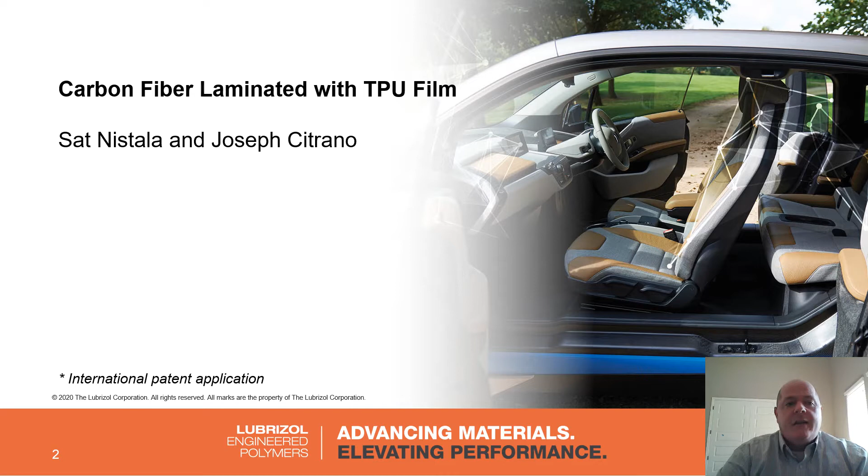Talking through the agenda: first, a brief introduction on what thermoplastic polyurethane is. We're going to talk a little bit about carbon fiber, the growing market, understand where it is now and where it's going forward, how TPU can bring value to carbon fiber laminate applications, and talk through two specific applications we have.

One is the exposed weave. It's where you can see the carbon fiber weaved into each other. This is what most people are familiar with. You see it on vehicles, in bike helmets, different kinds of applications.

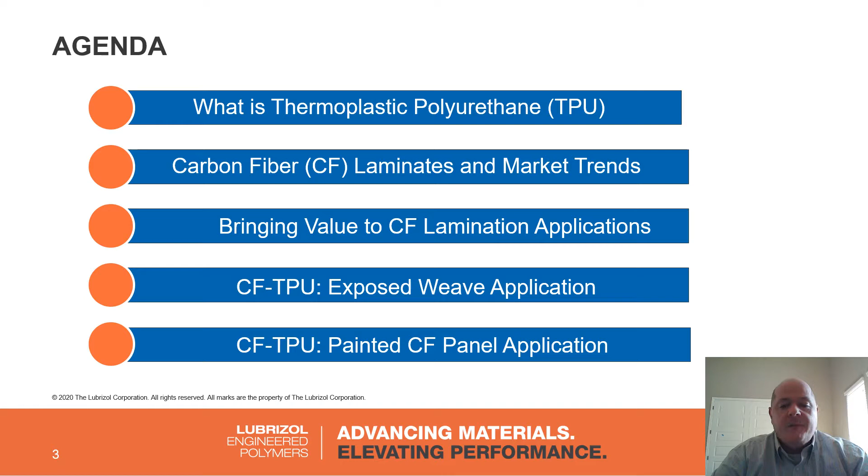Also, we have another application using unidirectional carbon fiber. This is actually most of the carbon fiber used out there. You don't see it because it's often painted or covered in some way to protect the underlying fibers. But again, this is another place where TPU can be useful.

So what is TPU? TPU is basically made of three distinct chemistries or chemicals: diisocyanate, a polyol, and chain extender. We can change these different materials, which gives a high number of permutations of different types of TPUs. In addition to changing the kind of chemistry, we also can do things such as change the ratio of the hard segment to the soft segment.

That gives a really big range of TPU, from a very soft, tacky adhesive down in the 50-something Shore range, all the way up to a structural plastic such as Isoplast up in the 82D or slightly above range. So it becomes a very diversified material. Thermoplastic polyurethane is not just one chemistry - it's defined by the urethane bond and includes several different chemistries.

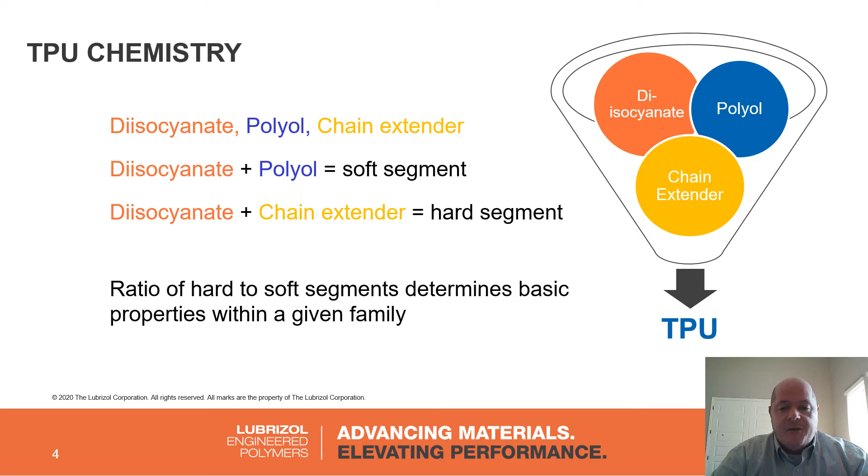Here are the main polyol chemistries that TPU is often referred to by. You have polyester and polyether, which are probably 75 to 80% of the TPUs that Lubrizol produces. But we also have polycaprolactone, or polycaps, and a few specialty polycarbonate-based chemistries.

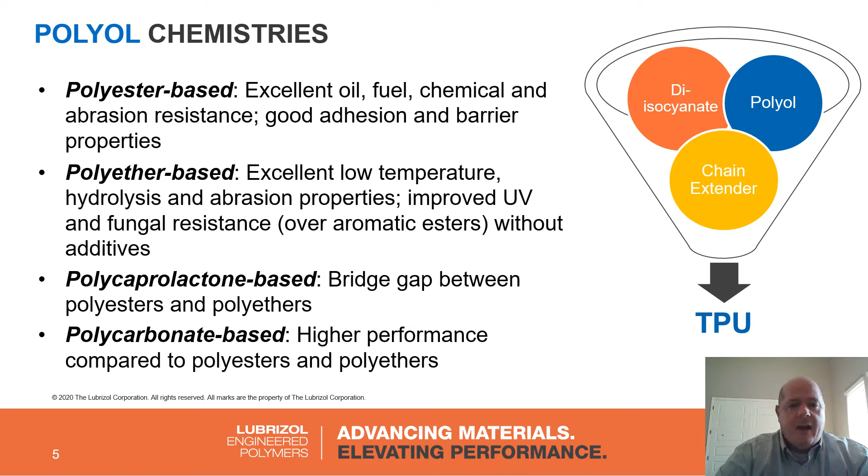These different chemistries have their strengths and weaknesses. For example, polyesters are really good for chemical and petrochemical resistance, where polyethers have good chemical resistance, maybe not as good as polyester, but also have very good low temperature flexibility. We have TPUs that are ductile down to minus 40C, maybe even below that. They also have good hydrolytic stability and some improved UV and fungal resistance. Polycaps are somewhere in the middle, giving you the best of both worlds. Polycarbonate grades are specialty grades that target high temperature applications.

Not only do we have different polyesters, polyethers, polycaps, and polycarbonate TPUs, there's also another family, if you will, called aliphatic versus aromatic. The real key difference is the UV performance of aliphatic materials. You can see in some further slides when we talk about it, they're very good at staying clear, non-yellowing with UV sun exposure, as well as having typical TPU properties such as abrasion resistance, tear resistance, puncture resistance, and so on. The main difference in chemistry is that in an aliphatic TPU, the benzene ring is fully populated with hydrogen.

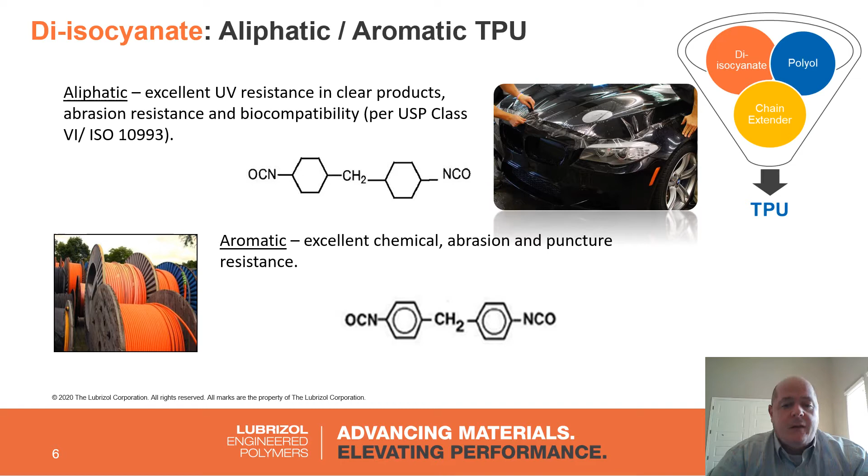Now we discuss aromatic TPUs. These are the bulk of the TPU grades out there - they're the workhorses, if you will. They have very good chemical resistance, abrasion and puncture resistance, as you'd expect TPUs to have. The challenge with aromatic TPUs, depending on the application, is that they will yellow with exposure to UV light. If they're colored blue or green, you will see the color shift over time.

One slide we always like to share when talking about TPU is the abrasion resistance, one of the main reasons to choose TPU. As you can see from this slide, this is a Taber abrasion test. Small bar is good - it means little weight loss. Big bar is not as good. As you can see, all the way on the left, TPU has a very, very low abrasion loss in the Taber abrasion test - probably 4 times or more better than nylon 11. So it's very, very good for wear applications.

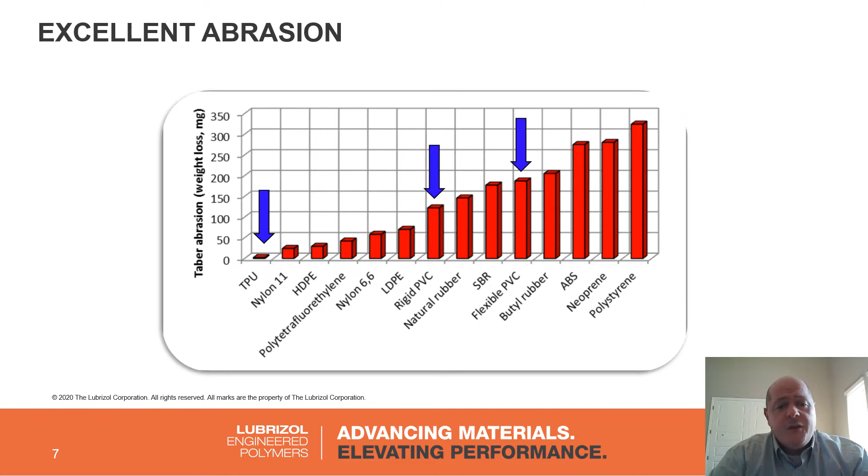Talking a little about our ALR series of TPU - this is one of our aliphatic lines of TPU. You can see some of the testing we've done as far as the delta YI, the color index, and gloss with exposure to UV light. This particular test is equivalent to 3 years in Florida weather, per ASTM G90.

If you start all the way on the left-hand side where you go delta YI, there is a slight increase and then fall back in YI measurement. However, you need to consider that a YI change of less than 8 is not perceptible by the human eye. So this little bit of change will really be imperceptible in the application, and the material will still remain non-yellow and clear.

Same thing with the color index. You can see that you get a rise to just over 1 during the cycle. But again, people cannot discern that color change unless it goes above 2. So again, you're still going to get a material when exposed to UV that remains clear and not yellow or not colored.

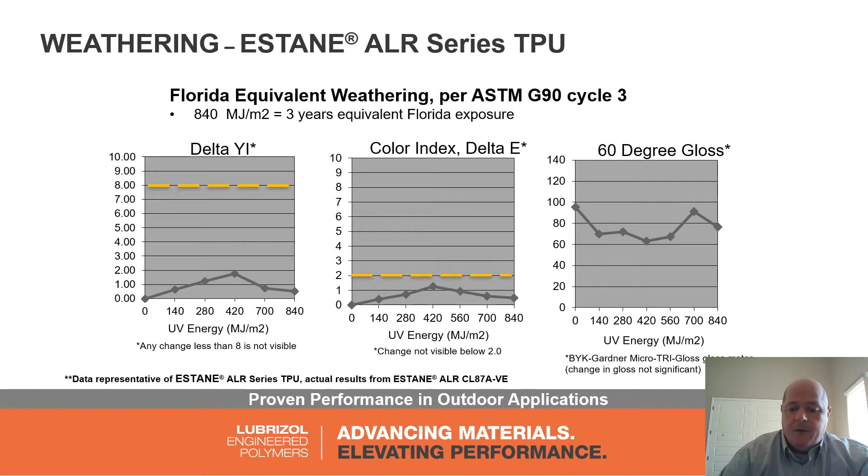This is an application that Lubrizol has been working with for decades. We have years and years of experience of our Lubrizol resin on vehicles in the field, non-yellowing and lasting for a decade or more.

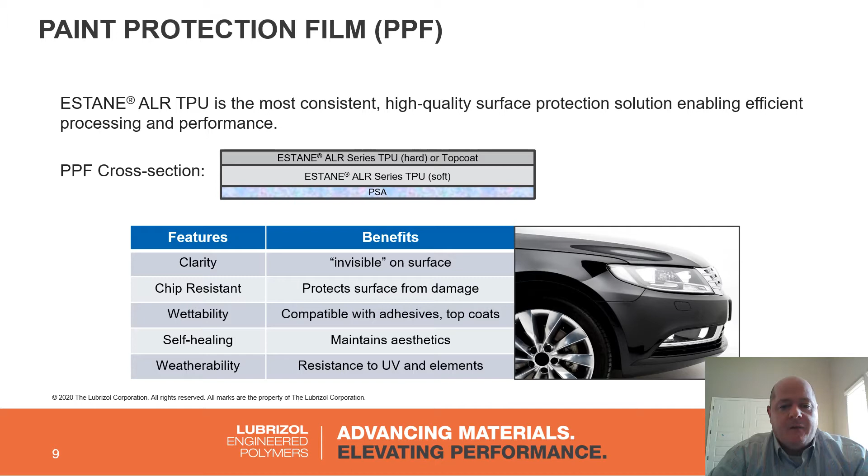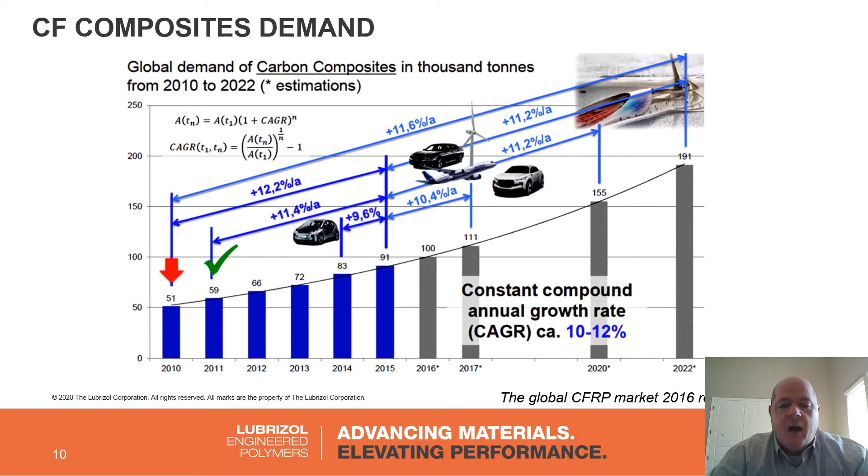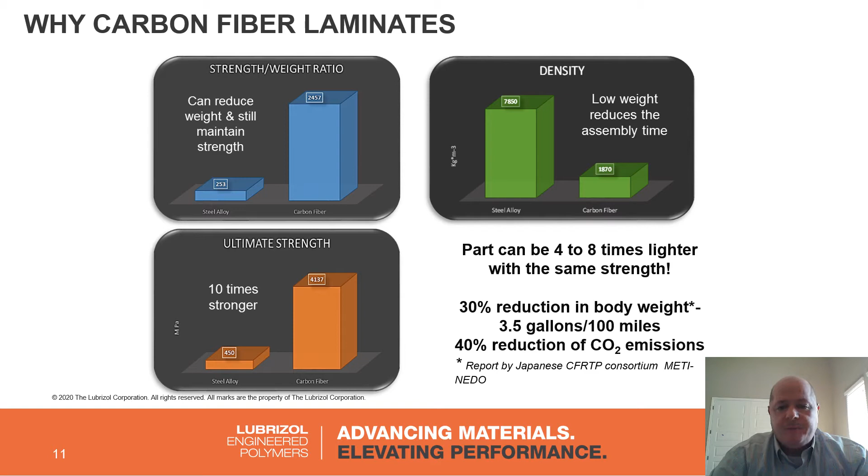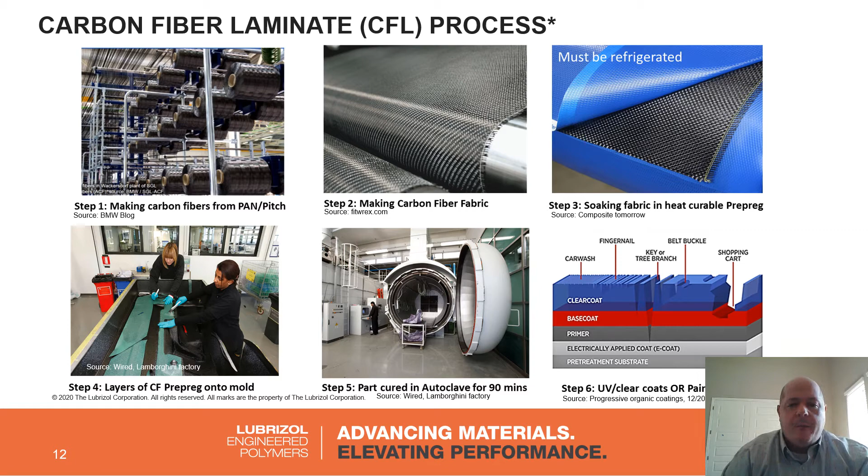And we're going to talk about specifically how Lubrizol aliphatic film is used in the exposed weave application.

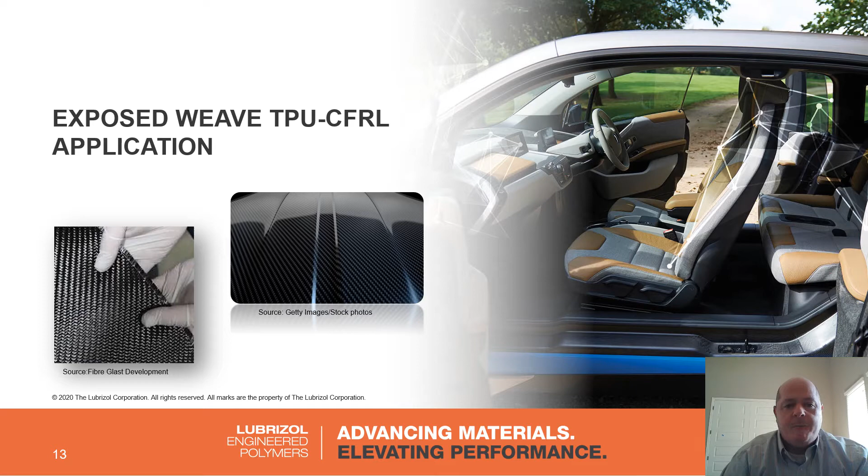In the case with TPU film, we can remove the UV coating step and the clear coating for abrasion step. So when you had seen those ladies putting the carbon fiber down inside of the tool, instead of putting the carbon fiber face down on the tool, you'd put a TPU film first and then the carbon fiber behind it. When that goes through the curing process, the TPU film will laminate directly onto the carbon fiber, giving it the scratch coating and the UV protection.

So it basically takes off a bunch of different steps at the end here. The other interesting part of the carbon fiber market is there doesn't exist, that we know of, a carbon fiber part maker that will go all the way end to end in their building. So they'll create the part, then have to send it out for UV coating and clear coat coating, then ship it back. This adds significant cost as well as supply chain time and complexity.

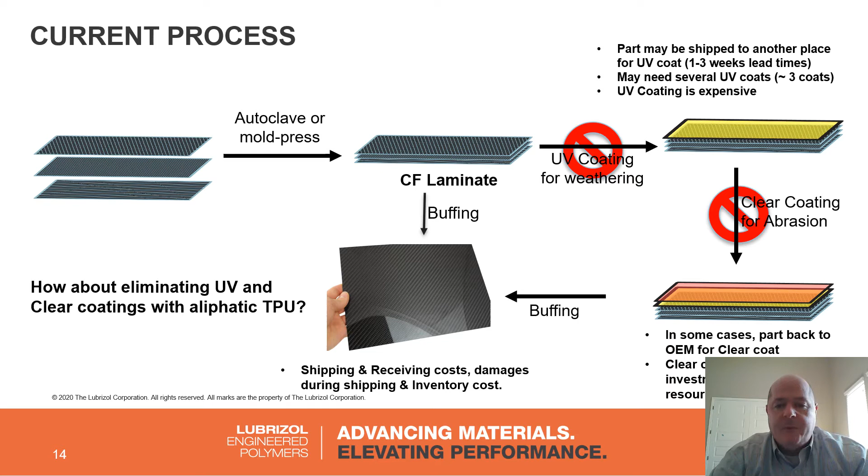So in this particular step, when you're using TPU as the underlying film, you can put that film directly in, create the part, and then the carbon fiber part producer can also buff that particular part and they're ready. It completely gets rid of the UV coating and clear coating abrasion steps.

Once you have that TPU on the carbon fiber, the ALR CL film, you'll have UV protection, abrasion resistance, shine, non-yellowing, chemical protection, scratch protection, and scuff protection—without having to do all of those extra steps of clear coating and preparation.

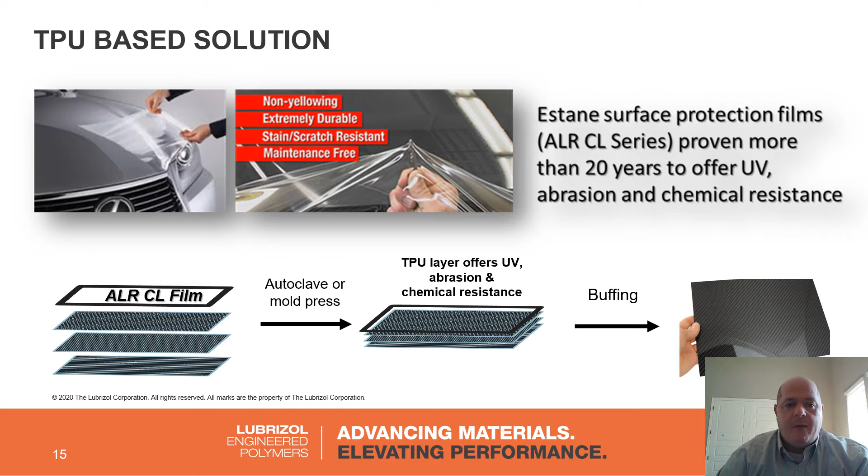What I talked about earlier in the beginning is basically a paint-ready TPU. This is using unidirectional carbon fiber. It doesn't look nearly as nice, the carbon fiber itself, as the exposed weave does. It basically looks like a black, ununiform black surface that is carbon fiber, and they typically take that carbon fiber and prime it and paint it. So in this application, we'll show how TPU film can be used to help remove some of those steps.

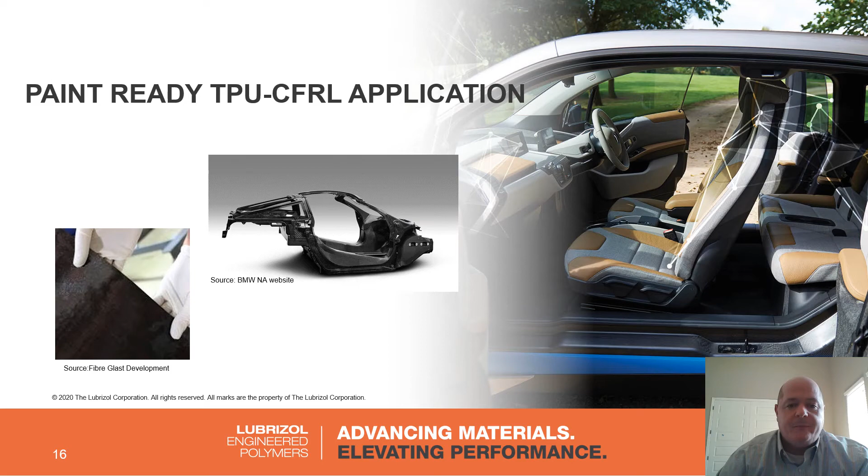The process is very similar using the exposed weave. The key difference here is that with unidirectional, when the part dries, you get little dry lines inside of it. You can see the little red dot in the upper animation where you can see some of those dry lines. So when you get those dry lines in the part, you typically have to have a human inspection where they're looking for the dry lines, reputtying, doing a primer coat, going through the process one, two, three times to get a smooth surface so they're able to paint the part and have it ready for use. This gives a lot of human labor and cost to finding these dry lines, puttying them, smoothing them, sanding them, buffing them, and then finally getting it ready for paint.

Now with TPU material, you can basically get rid of the primer coat and putty. So your part, again, you put the TPU film down. The TPU film can be colored. Put it down in the tool, the unidirectional carbon fiber behind it, part comes out primed and ready for painting—again removing a couple of steps from the process.

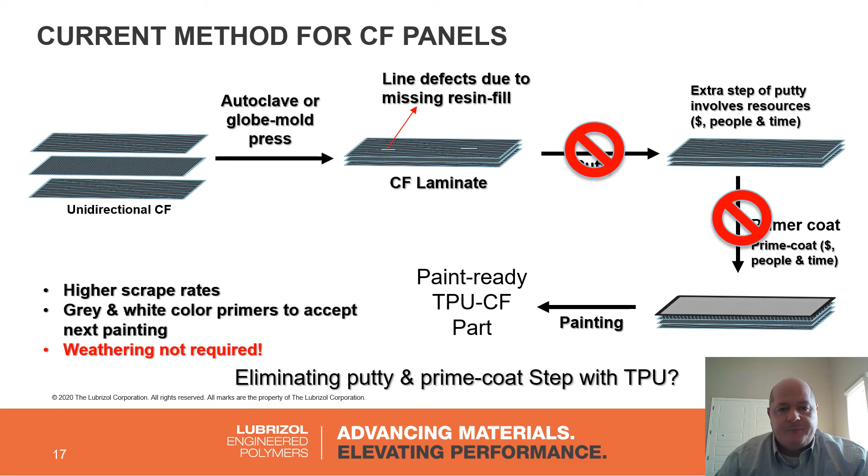Now, this TPU, as I mentioned, can be colored whatever base color you'd like it to be. TPU is readily compatible with master batches or can be compounded into color. Typically you can see grays or whatever color that will look best underneath the underlying finished paint and clear coat step. So basically the same thing, TPU on top of the carbon fiber, paint directly on the TPU.

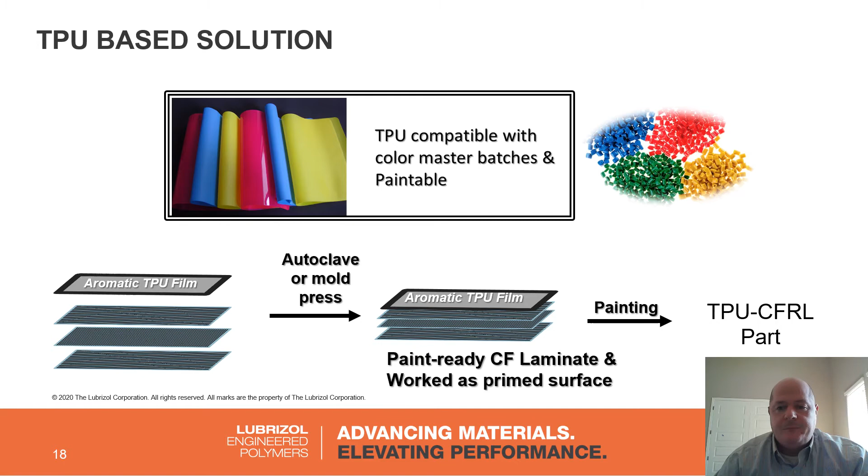Talk a little bit about some of the lab development we had done in Brecksville, Ohio. We had done different levels of prepregs, two and three, different stack ups. We've tried many different films, from a monofilm to a co-extruded soft-hard film, to different aromatic films. In these particular tests, we did different geometries from curves to sawtooths to see if the film would move and form with the part and give you that clean surface. Again, these samples have piqued OEM interest, and we are in consistent development with getting these out into the field.

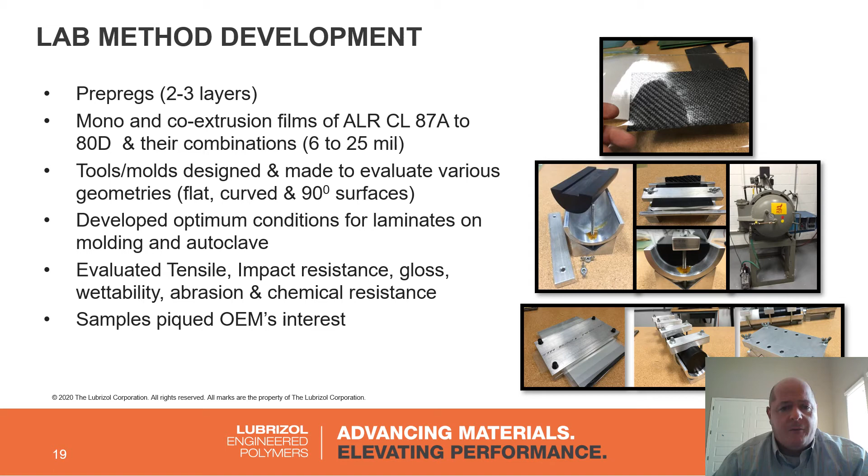But there can be other applications as well out there for carbon fiber. Here is some additional results of the carbon fiber. So we did all of the testing for Florida weathering, looking at the gloss, how it heat ages, chemical and abrasion resistance, checked physical properties of the carbon fiber, checked that the film could be painted. As another item, it's also possible to print a logo on the film. So if you wanted some kind of artwork or something of that nature, it could also be part of the film sitting on top of the carbon fiber.

The other thing we've noticed during this testing is that in some cases, depending on the carbon fiber matrix you choose, the film will increase the impact resistance of the overall product. So if you look at the bottom right picture where you have the gray and the black, you can see a drop dart test. On the left you can see clear through into the black, the uncoated carbon fiber—you can see that the dart basically went through the carbon fiber completely.

That same exact height and inch-pound of force left a bump or indentation into the carbon fiber with film in the gray, but did not fully go through. You can see from the chart the increase in the impact drop dart test.

Additionally, depending on the construction, we have seen a modulus increase in the overall construction on the order of about 20 to 25%, which again, if the whole point of using carbon fiber is for strength, if you can make that existing carbon fiber stack up or build up of material stronger, then you could further potentially reduce weight.

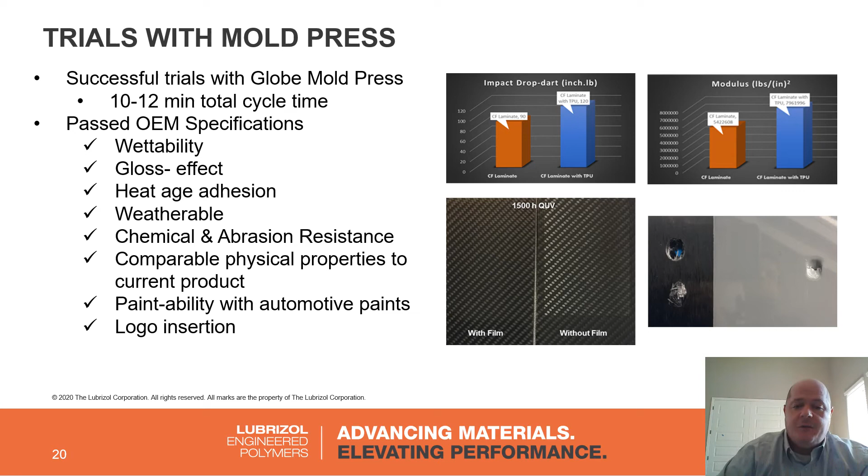More of that - we're talking about different stack ups of different carbon fiber with modulus. You can see, for example, the yellow bars, as in this particular case, it was an ETE grade, might be a little bit difficult to see on your screen. You can see that the modulus had increased.

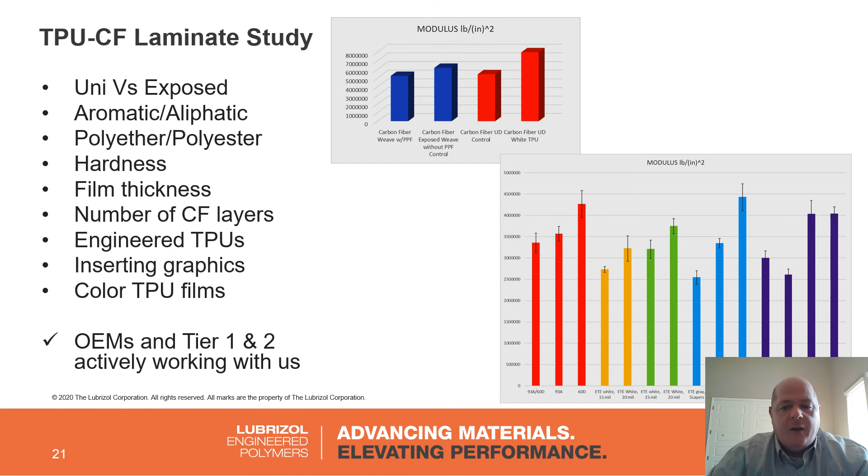And then you can also see it with different levels of different kinds of TPU on the carbon fibers. But if this is something that is of interest, it would take a little bit of trial and error to get your carbon fiber stack up, or your customer's carbon fiber stack up, used with the correct TPU to get that modulus increase.

Finally, another application that came as part of this as a spin-off, somewhat separate - it's an in-mold film solution for different molded parts using ABS, acrylic, PC, PC-ABS, or any plastic that TPU will readily stick to.

I'm going to walk you through the top piece here, steps 1 through 4, on what's happening in the diagram. In step 1, the film would roll in front of the mold, just in the mold on top. In step 2, you either have an electrostatic attraction of the film to the mold, or vacuum can be used to get that film into place. Then step 3, you inject your plastic, close your tool, form the part.

When you retract your tool and your part pops out, you now have a plastic part with TPU laminated over the top. You can see that in some of our pillars, or black plastic simulating pillars, on the bottom right there, where you can actually see that the ALR TPU is basically over the ABS plastic.

In this particular case, the TPU is going to give UV resistance, scratch resistance, but it also glosses up the ABS film to an 80 to 90 gloss range. This can be replacing a paint process or a hard coating process, or perhaps even a dual shot application to where you're putting something over the ABS to protect it.

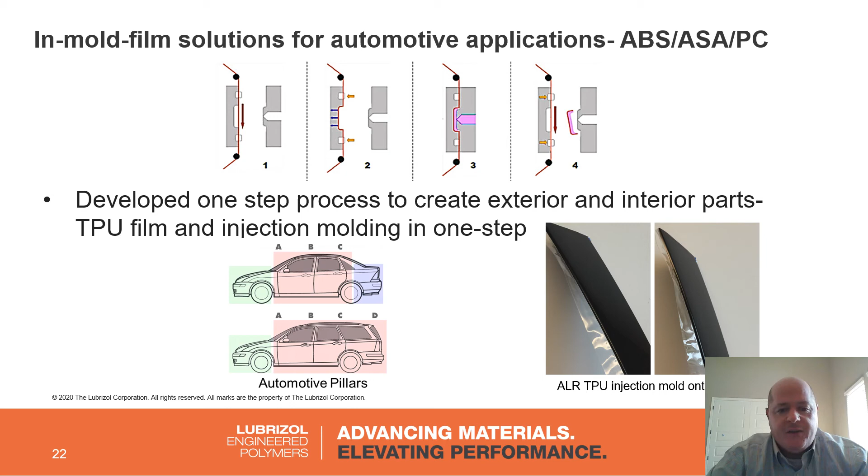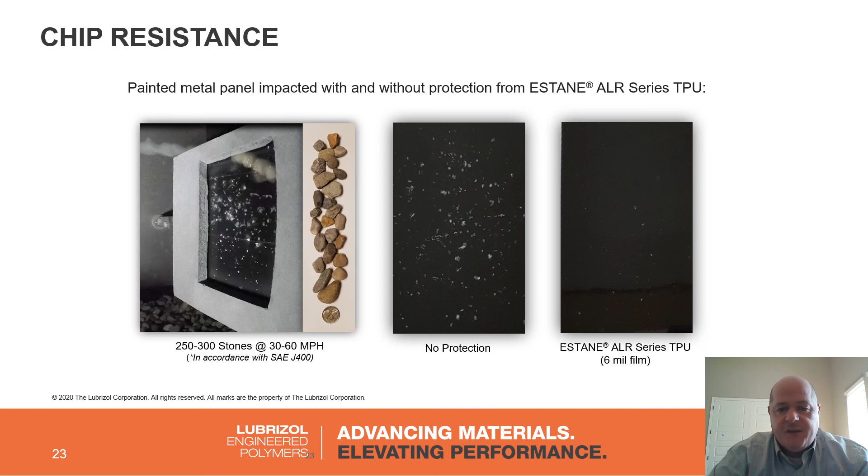So again, the TPU is giving impact resistance along with abrasion, UV resistance, chemical resistance, and all the other nice things that TPU can do for the underlying plastic.

So to summarize, aliphatic TPU is shown to reduce UV damage, replace clear coats, and basically give a cost savings for exposed weave applications by removing that clear coat type painting that is required to protect the underlying TPU.

Aromatic TPUs have been shown to eliminate puttying and sanding steps, getting panels ready to be painted and shipped out - saving time from that puttying, that sanding, that reiterative process that basically gets a part nice and level, ready for painting.

We've extended this application to in-mold film applications, to where you could be doing pillars, other piano black applications, interior applications, places to where the underlying plastic, such as ABS, needs to be protected from scratch, mar, UV, chemical, and so forth.

You can print on TPU film. You can either print on the underside or top side to basically give a logo, piece of artwork, whatever you may want to do. We've noticed a significant improvement in physical properties in some different applications with TPU, such as flex modulus and puncture or dart drop tests.

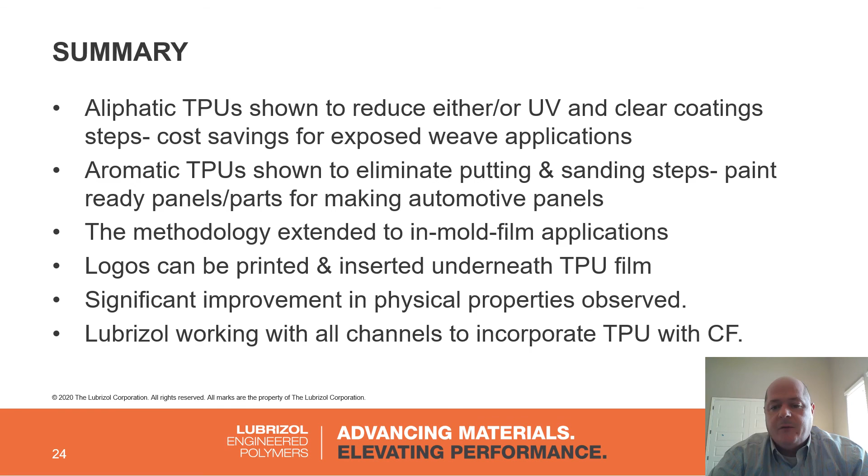And basically, we are currently working with all channels to incorporate TPU with carbon fiber, anywhere from all the way back at the carbon fiber producer to the parts producer down through the end OEM to make this application come to reality.